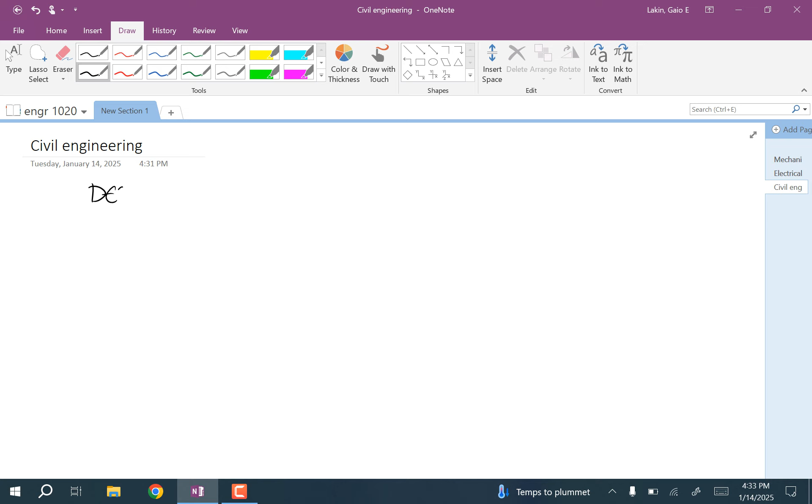This is a summary of the civil engineering discipline. It's one of the three biggest branches of engineering, along with mechanical engineering and electrical engineering. Civil engineering involves the design, construction, and maintenance of the environment.

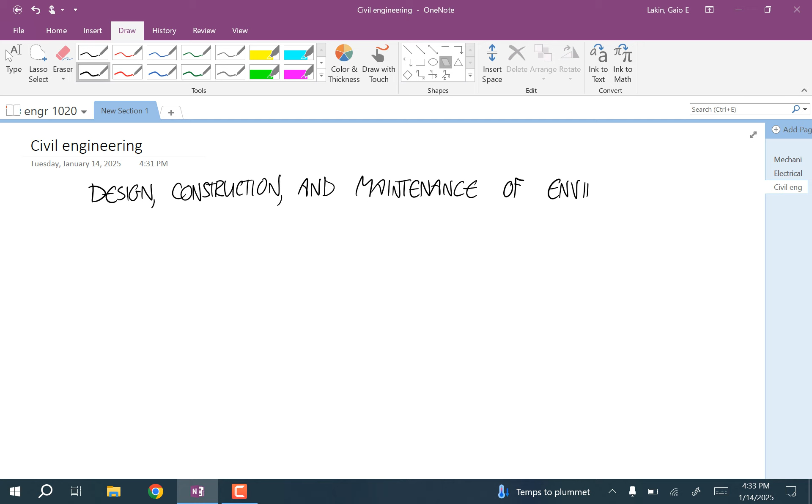This includes work with roads, bridges, canals, dams, airports, sewage, pipelines, buildings, and railways.

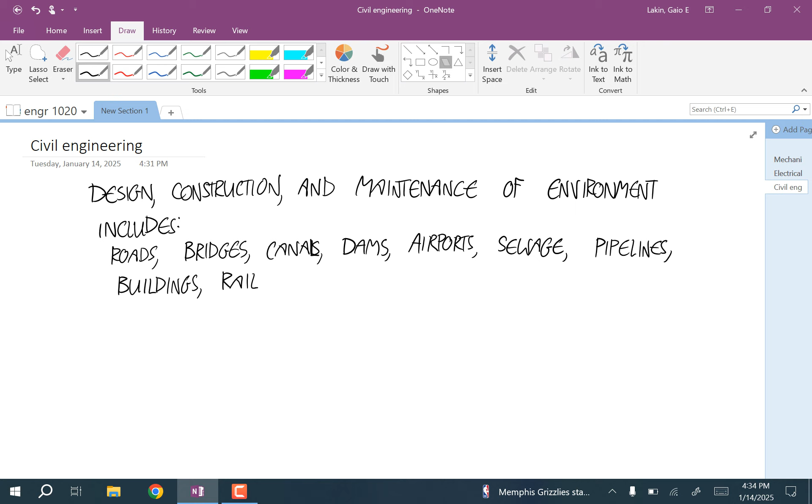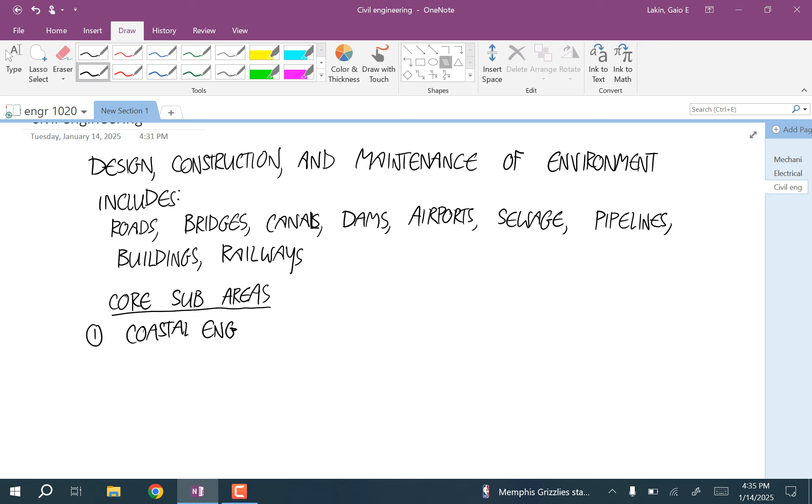The core sub-areas of civil engineering: the first one is coastal engineering. That has to do with interacting with the coastline, putting up barriers to prevent floods, and building near the coast, things like that. With the sea level rising, this is going to be a really important area of engineering.

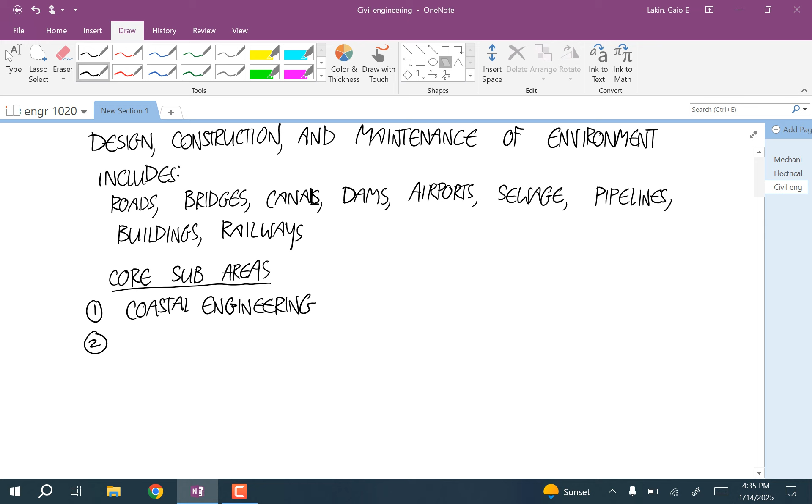Second is construction engineering. You can sometimes find this as its own department at certain universities.

Third is earthquake engineering. This is making sure that man-made structures are able to maintain integrity during earthquakes.

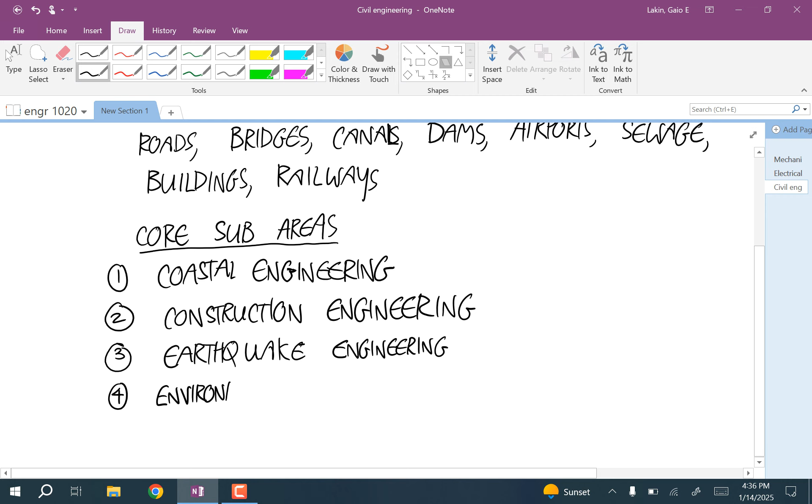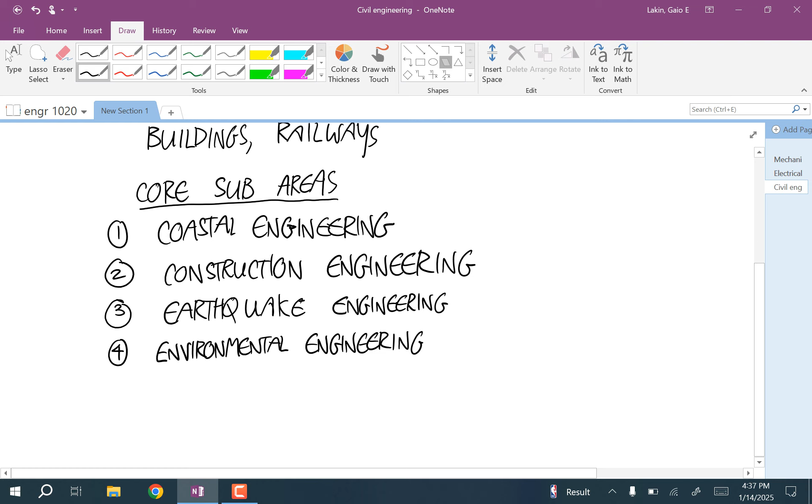Fourth, this is a big one for a lot of people, environmental engineering. This is often its own department, and you can find this at a lot of universities. For people who are interested in working in green industries, civil engineering is a place where that fits really naturally, probably the most naturally, specifically in environmental engineering. This is just the study of how to preserve the environment through engineering projects.

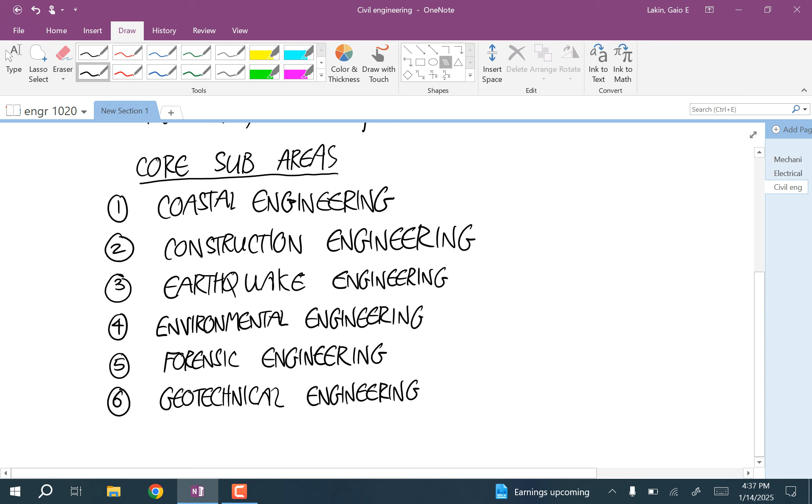Sixth is geotechnical engineering. You can think of this as studying the interface between man-made structures and the land. This has to do with the properties of soils and the ground and things like that.

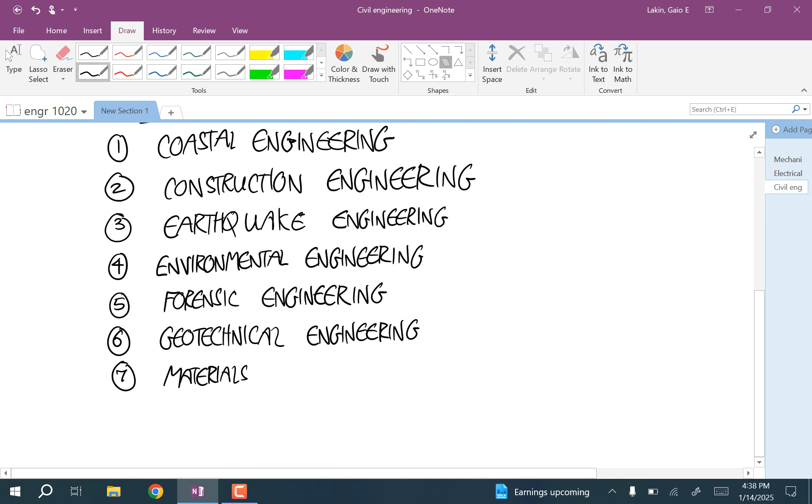Seventh is materials science. I listed materials science as one of the core sub-areas of mechanical engineering too, but here we're often just dealing with different types of materials. Eighth is site development and planning.

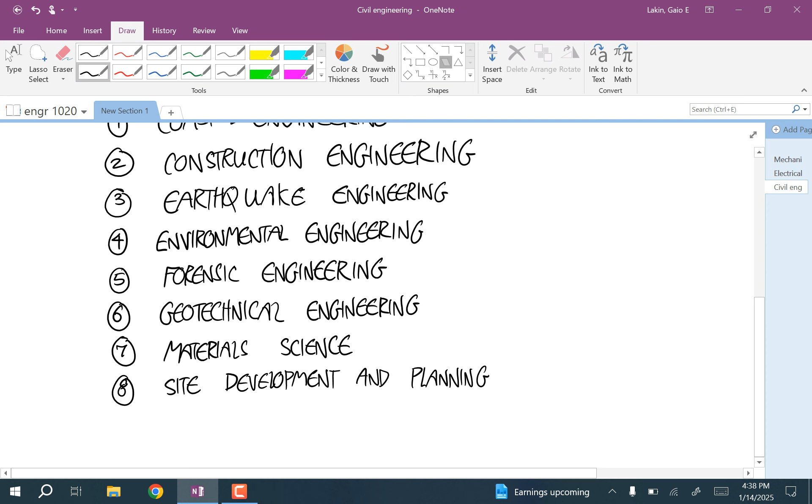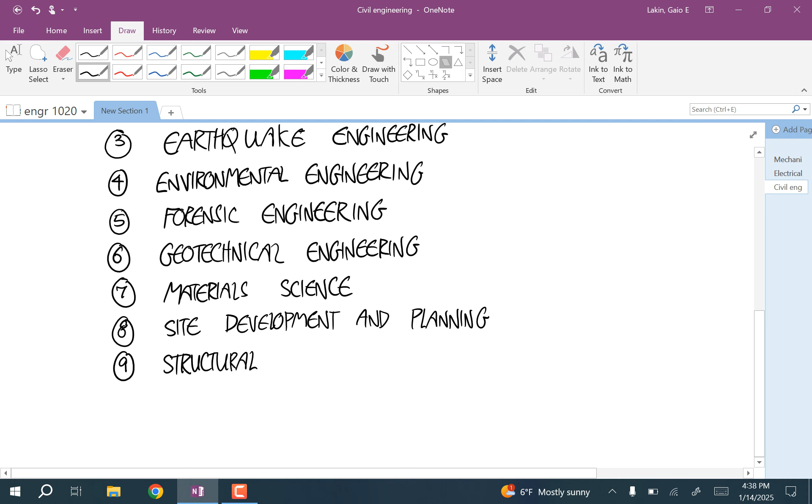Ninth is structural engineering, which is calculating the forces, stresses, and things in structures. Tenth is surveying.

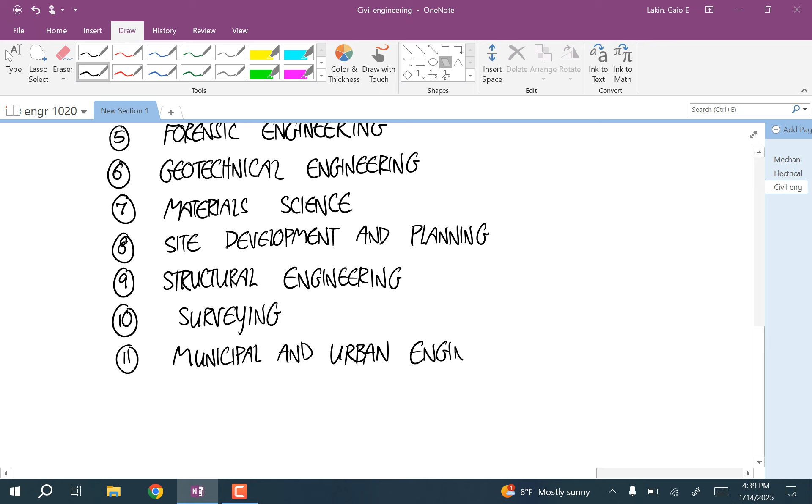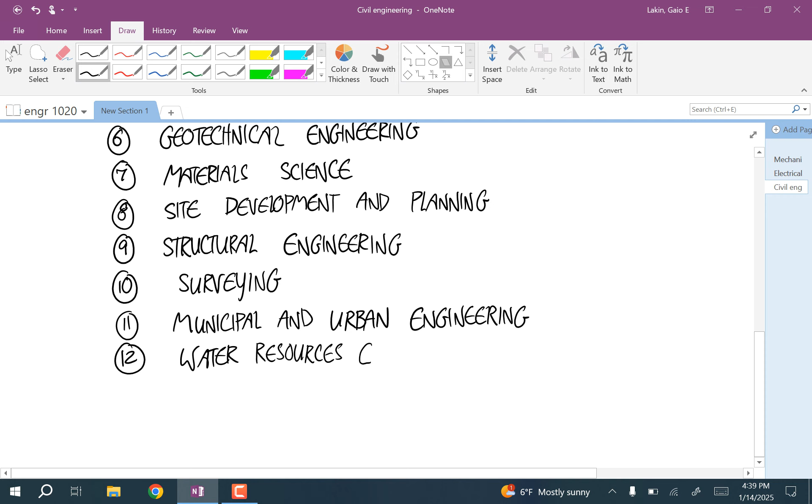11th is municipal and urban engineering, which is planning out city projects. 12th, almost done with this list, is water resources engineering. And the last one, number 13, is civil engineering systems, which is how different civil engineering projects fit together.

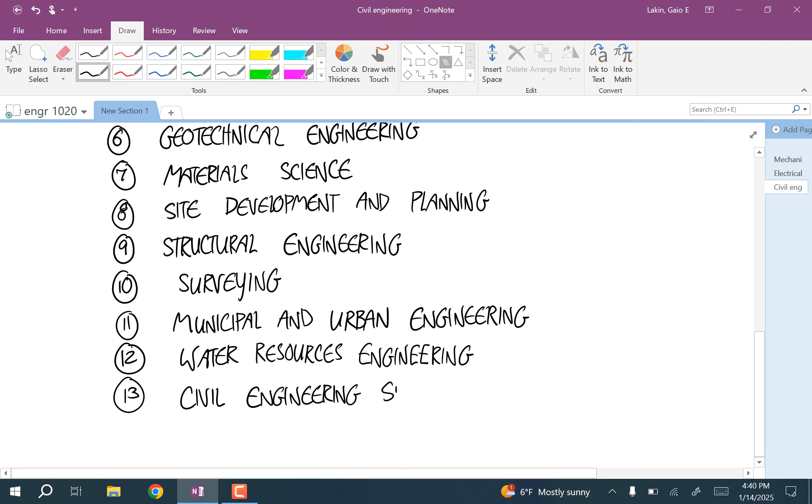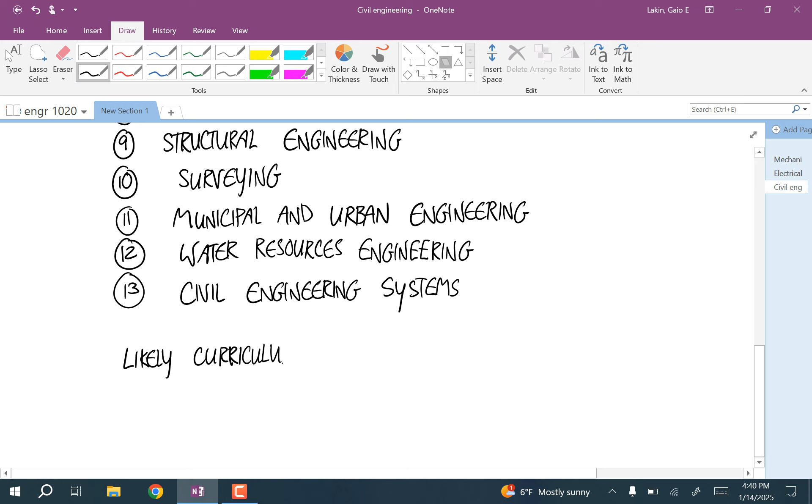If you study civil engineering, this is a likely curriculum of classes you'll take. First, for math, you'll have to take all the calculus classes. One thing I want you to notice is that the curriculum for civil engineering has a lot of overlap with mechanical engineering. There's a lot of similarity in the things you study, even though what you apply this knowledge to is different.

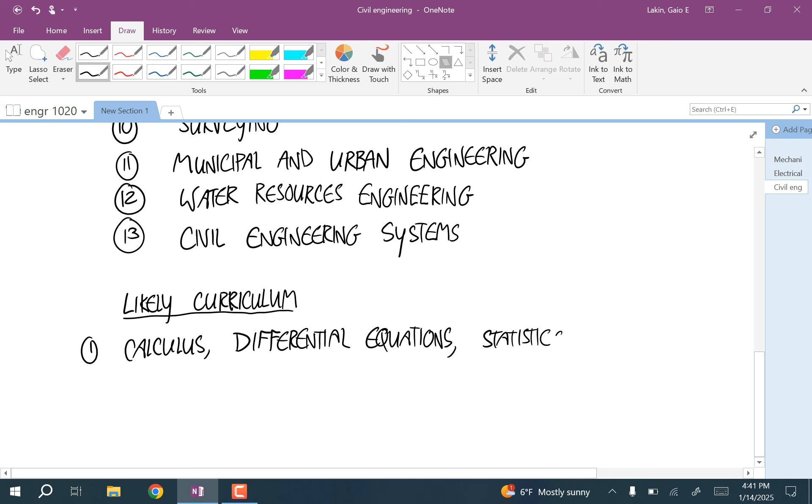You'll have to take some differential equations, and you'll have to take some statistics. Then for science classes, you'll have to take two semesters of physics, and you'll have to take some chemistry.

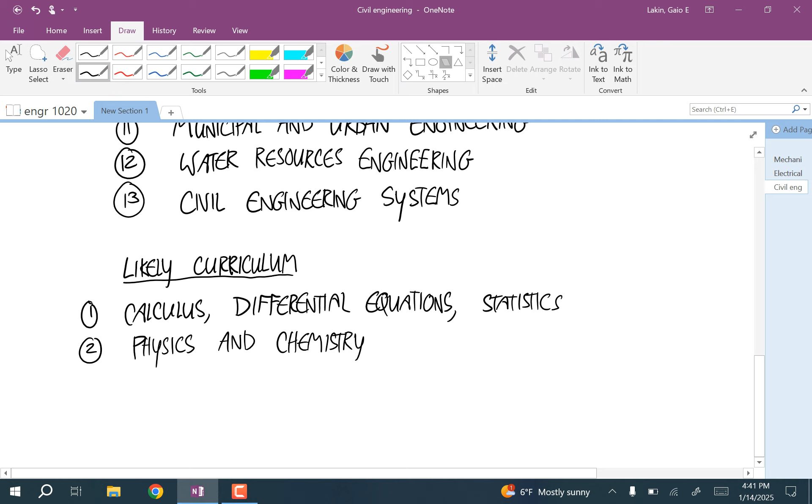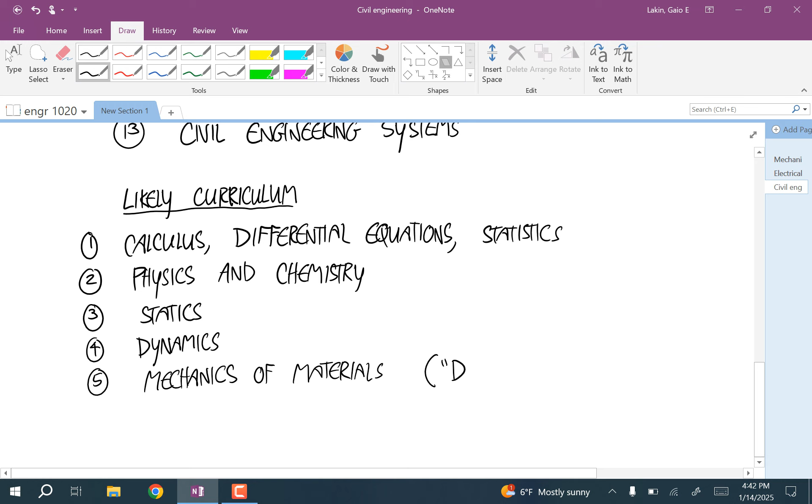Then for the engineering classes, you'll have to take statics, dynamics, and mechanics of materials. Remember, mechanics of materials is what most universities call it, but at Normandale and at the U of Minnesota, we call it deformable body mechanics, or DEFORM.

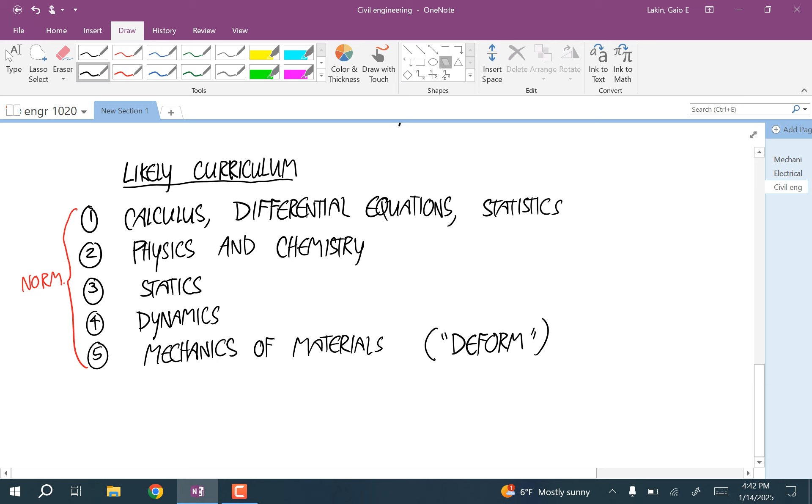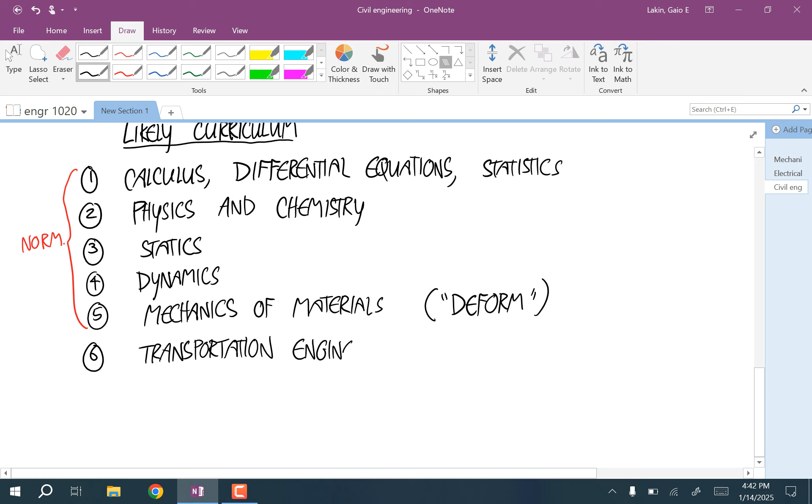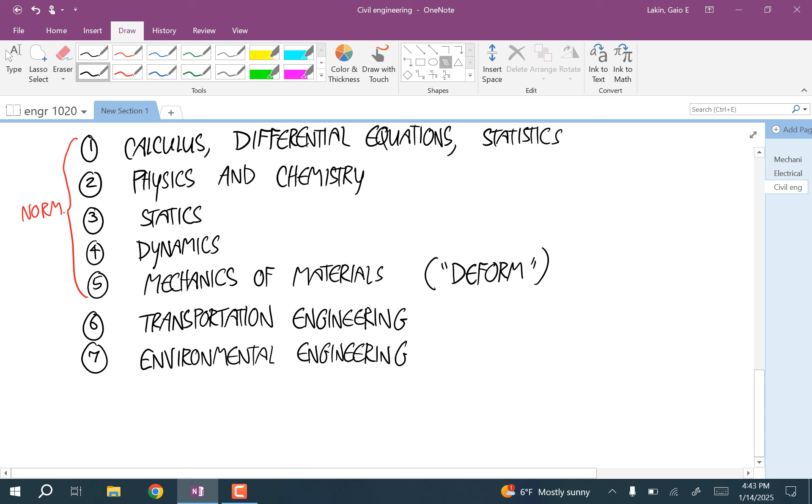These are the classes you can take at Normandale, and the rest you would have to take after you transferred. Next would be a class in transportation engineering, then a class in environmental engineering. I'm saying it as if this is a sequence, but often the sequences would be different after you took your core classes, the ones I have listed that you can take at Normandale.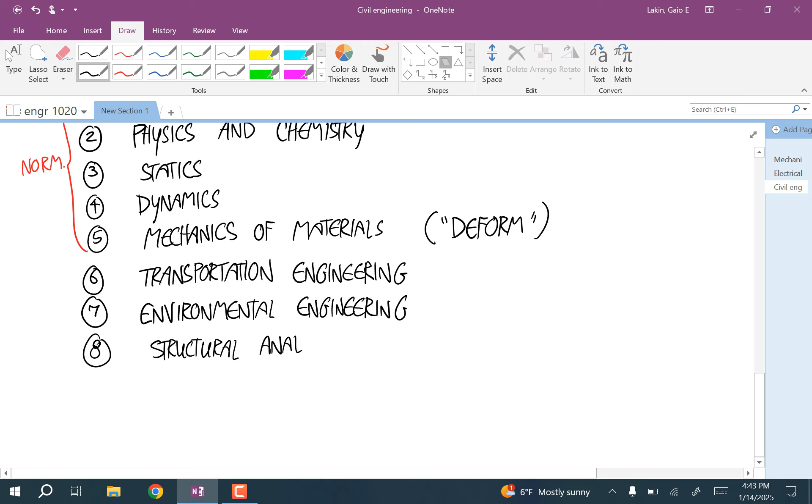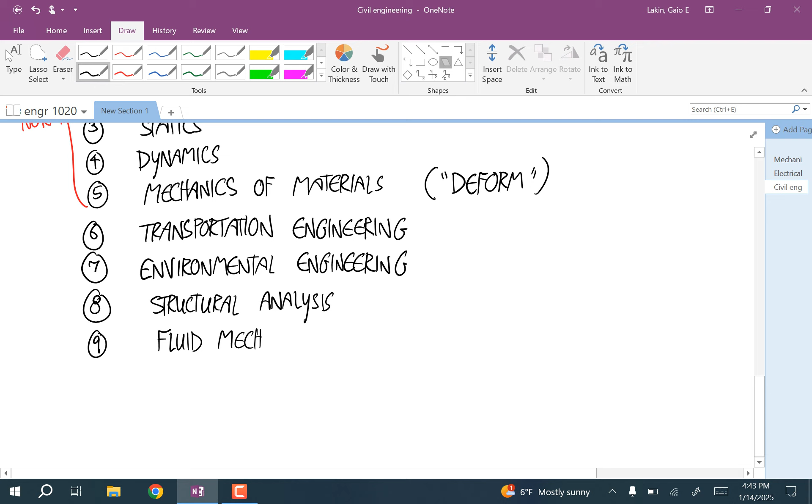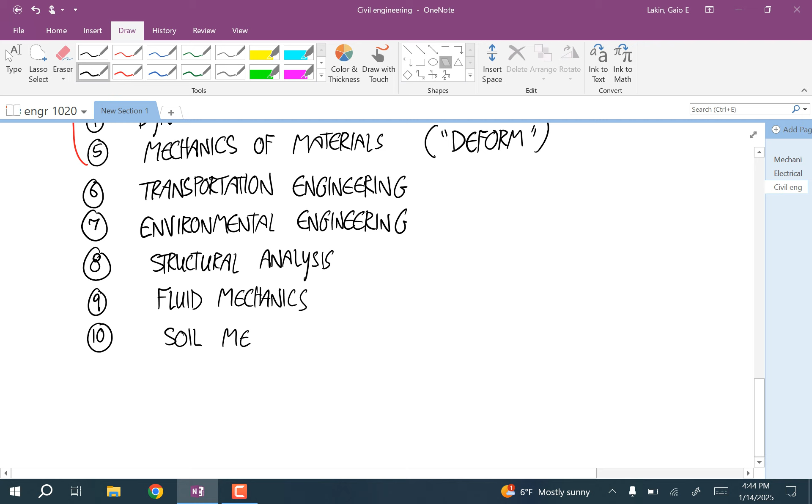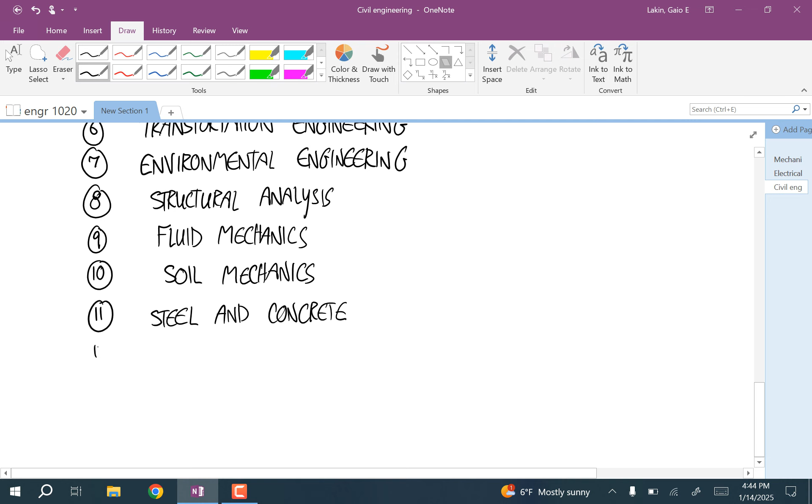Structural analysis. Fluid mechanics. Number 10 is soil mechanics. Then you probably have to take some classes related to the material you're focusing on—this has steel and concrete listed. And finally, hydrologic design.

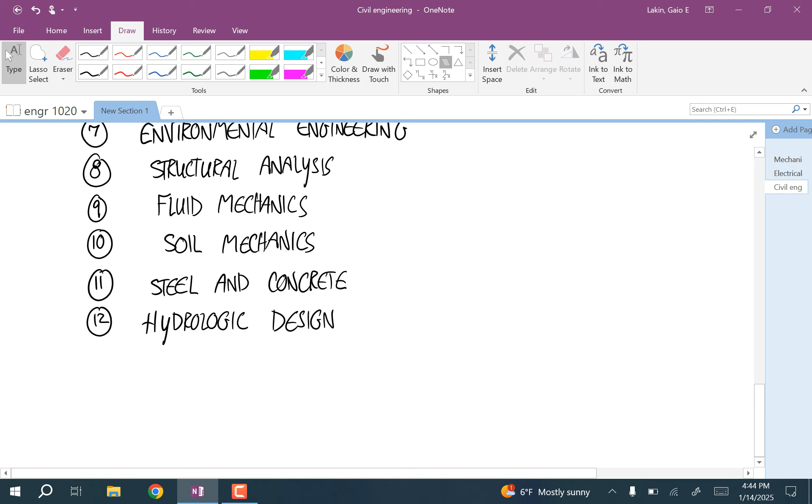As far as the occupational information, the 2023 median salary for civil engineering is $95,890. This is one of the three biggest branches of engineering, so the number of jobs in civil engineering throughout the U.S. is 341,800.

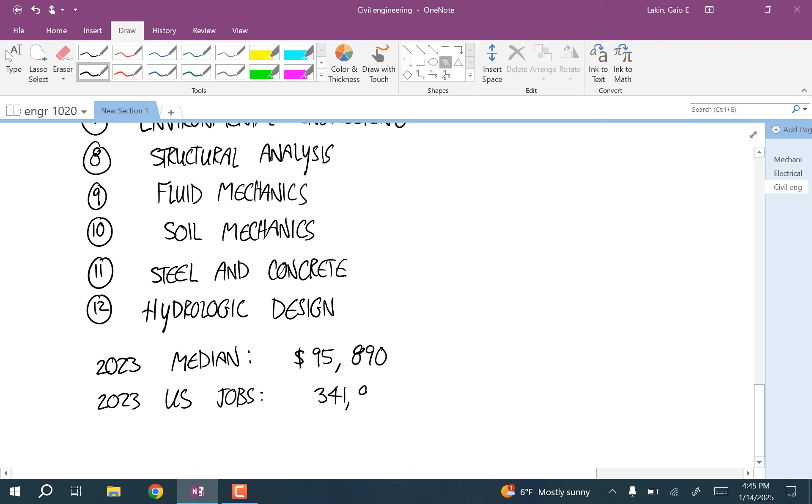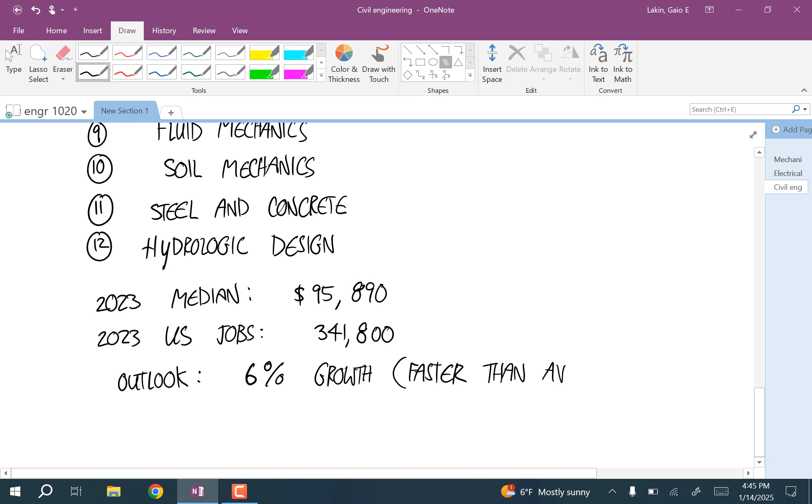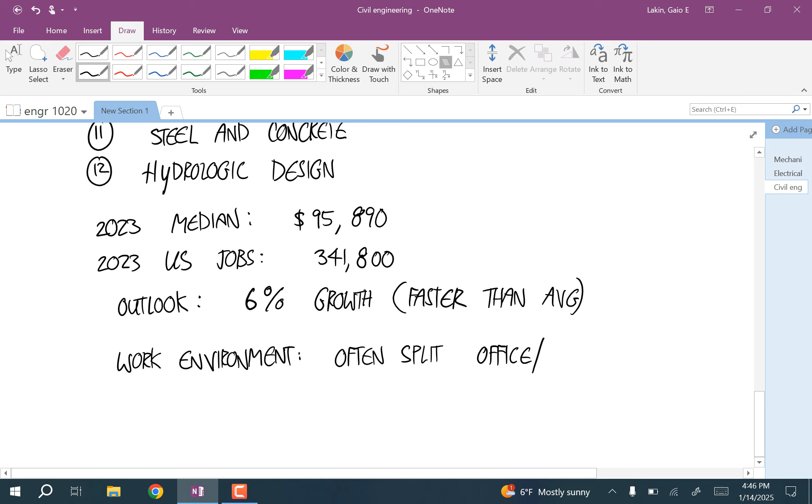And the future outlook is 6% growth, which is faster than the average across all industries. One thing to keep in mind about civil engineering is that the work environment often involves some work out in the field or out at construction sites. This is an area that people often go into if they just don't like the thought of sitting in an office all day, so this is often split between an office and some site.